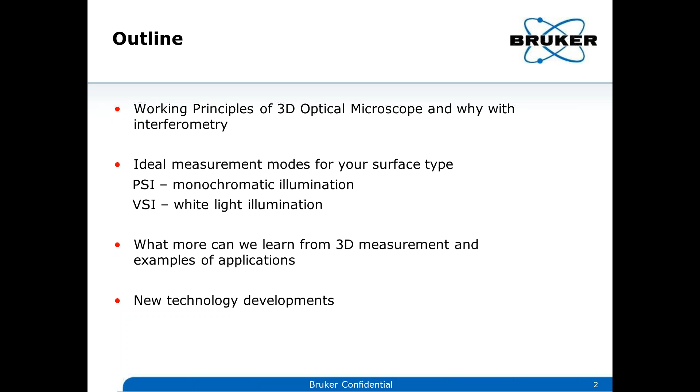Today, we'll be talking about a surface metrology tool using white light interferometry technique, and then we'll be seeing what it can do for your application. So the broad outline of the talk is going to be: we're going to talk about the basic principle behind white light interferometry, and discuss some of the different modes that are there and when to use which one to suit the application. Then we're going to learn a little bit about what more we can do from the 3D measurement. So what, other than roughness, what else can it inform us? How can it improve our research goals? And then I'll also briefly touch upon some of the new technological developments taking place in this field.

So let me first talk about where it's being used at the moment. Surface metrology, especially the white light interferometry technique, is being employed by many different industries at the moment, from automotive, orthopedics, contact lenses in medical device markets, making drill bits and solar cells, or also in PCB semiconductor industries. Many different places where you need surface characterization. You need to understand the smoothness of the surface, how well the soldering is done, certain features, certain contours that we need to measure.

So we have a saying: if you can't measure it, you cannot make it. That basically means, if you cannot measure a parameter, you cannot control it or improve that parameter. So that's one of the key things driving this technology.

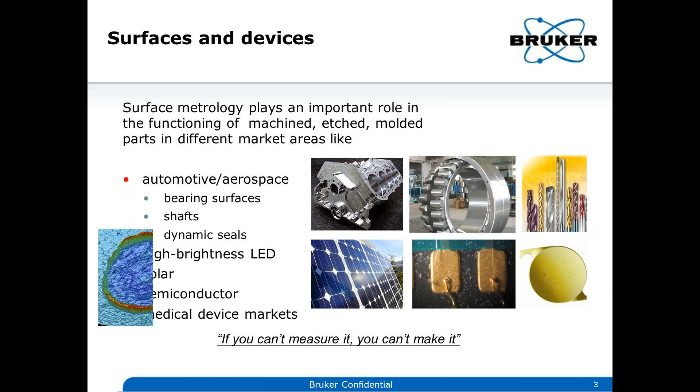So why use white light interferometry technique? Compared to the traditional surface profiler, it's non-contact. It's fast, so you can get, for example, a 4 by 4 millimeter area in a few seconds instead of the traditional few tens of minutes. It's accurate—the accuracy is in the range of nanometers. It's repeatable, largely automated, so you don't have to worry, it's very repeatable. And then you can measure topography, waviness, roughness, and some special parameters like S parameters, all those things.

So here, if you can follow my mouse pointer, this is like a traditional microscope setup for white light interferometry, but the objectives are interferometric objectives. If you look at a normal microscope image, it would look something like a black and white camera image. Whereas using our interferometric objective, you'll start seeing these interferometric lines—we'll talk about them a little later. Once you measure them, you can get renderings, like 3D renderings, or bigger areas like a 2D rendering, and you also see some kind of line profile there. We'll go through them one by one in the coming slides.

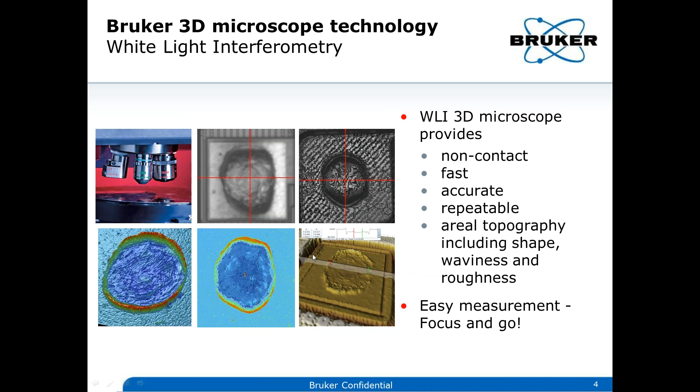So a little bit about the technology: it's based on interference, as I mentioned. What is interference? A very brief introduction would be, if you have a single source of light, and then you split it into two parts, and one of them goes through a slightly longer path length compared to the other, when you recombine them, you get this kind of interference fringes.

If you've gone out on a rainy day in the parking lot, you'll see this oil slick, and you see all these colors. These are coming from the interference fringes, coming from the top and the bottom layer of the oil surface.

So we use these interference fringes in white light interferometry like a contour map. Many of you would be familiar with the contour map, so it's going to look like the bottom image. You have all these lines, and each line represents a certain altitude, with certain numbering on them saying what the altitude is there. The closer the lines are spaced, the steeper the elevation is. On the top, you see there are no lines, meaning it's a very flat surface there.

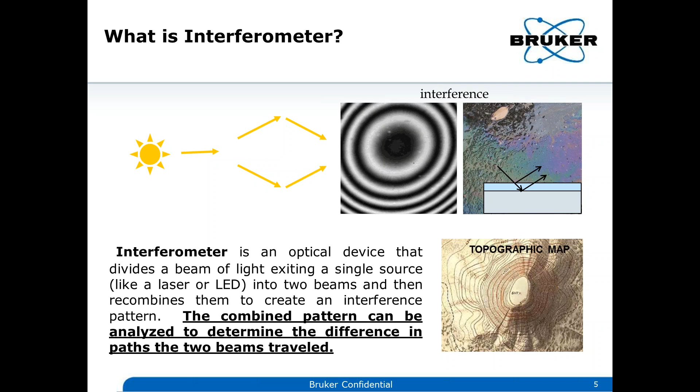So what is missing in our interference images normally is this numbering. You do not know, for example, if the interference fringe here is coming from a concave or a convex shape. We'll talk about it later, how we can get this numbering using white light.

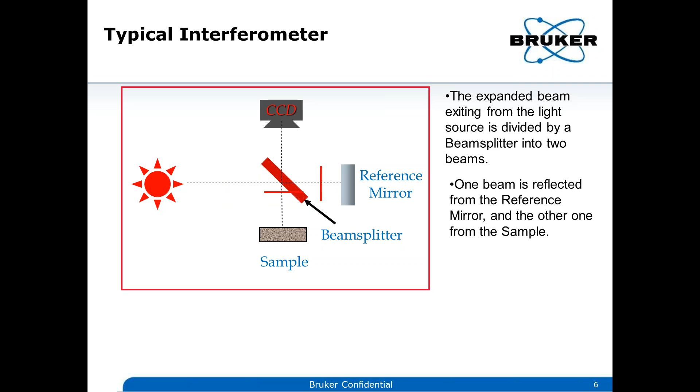So how it's implemented in our system is: you take a single source and split it using a plane beam splitter. One half of the beam goes to your reference mirror, the other half goes to the sample, and then you recombine them and collect the light in your CCD. Ideally, if your reference mirror and the sample are exactly the same, then you have path difference zero at the focus point, and what you see will just be a bright light in your CCD.

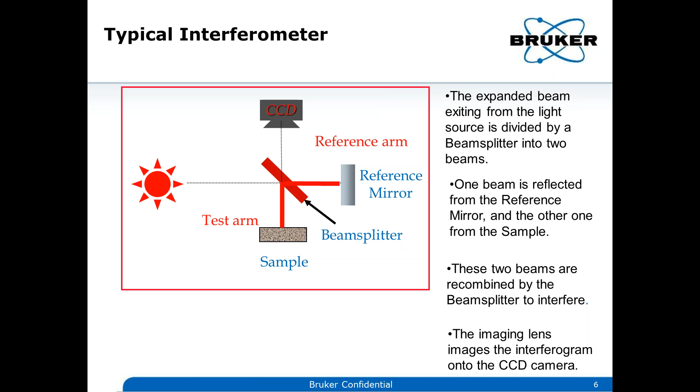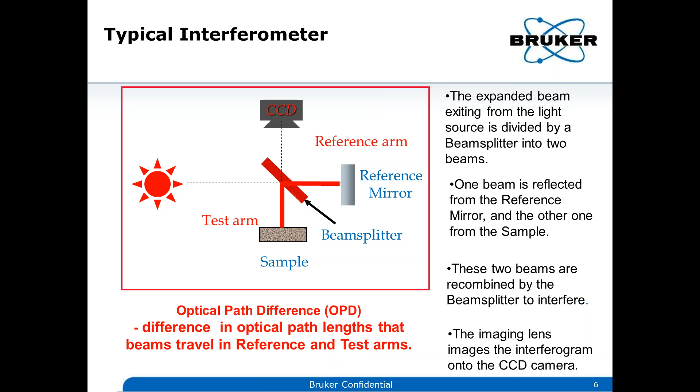But that's not the case. You're going to always have roughness and surfaces different from the reference mirror, and this creates the optical path difference, which is what you measure. That's why it's called the optical path difference, and all the files you save will be called the optical path difference file. This is the main data, and this creates the interference, from which we can calculate all the parameters we're interested in.

So a little bit more about the fringes. If you take two plane wavefronts, two beams, and one of them is tilted from the other, then at certain places you have the difference between the plane one and the tilted one equal to lambda, the wavelength of the light you're using. At certain places you have two lambda, three lambda. So every integral multiple of this lambda, you get a bright fringe. And at the half integral, lambda by two, you get the dark fringe.

This is like a monochromatic light. If you use a red light, you get something like this. Let's keep this in mind - if you have these kinds of bright and dark fringes when you have a small tilt, we'll talk a little bit more about them later on.

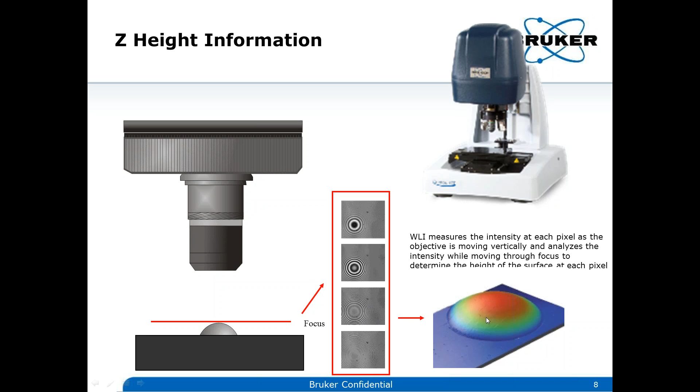So if you have a lens or something like this, a convex shape, what happens is we try to change the position of your objective. By doing that we change the focus position, and thereby we see the fringes also change. If you focus on the top position, you get the fringes like this, whereas if you focus a little bit lower, somewhere here, you get some fringes like this. So you move your objective basically, and you collect the whole surface, recreating it.

So this is very similar to a normal microscope. The difference in this white light interferometry is basically the objective and the algorithms that analyze your data. These are the two differences.

There are three main types of interferometric objectives. The most commonly used ones are Michelson and Mirau. Michelson is basically what many people are familiar with as the Michelson interferometer - it has the same principle. Mirau is a slightly different take on that same principle of interference.

Michelson is basically: my sample is here, and I have a beam splitter in front of my objective, and one half goes to the reference mirror and the other goes to the sample. Then I collect them all through my objective and analyze it in my camera. So for example, here you have the reference mirror, the beam splitter sitting somewhere inside the objective, and your sample is here.

This technique works for low magnification because you have enough working distance to put your beam splitter and other things. But when you go for higher magnification objectives, like more than 20x, your working distance is very small. There, you come up with a new design, the Mirau Interferometric objective.

Here, instead of one beam splitter, you have basically two. So you have a beam plate here, and then another one with a mirror. It's a very small mirror, and compared to the field of view, it's negligible, so it doesn't affect your measurements really. So you have this kind of technique, and you can go up to 100x in this.

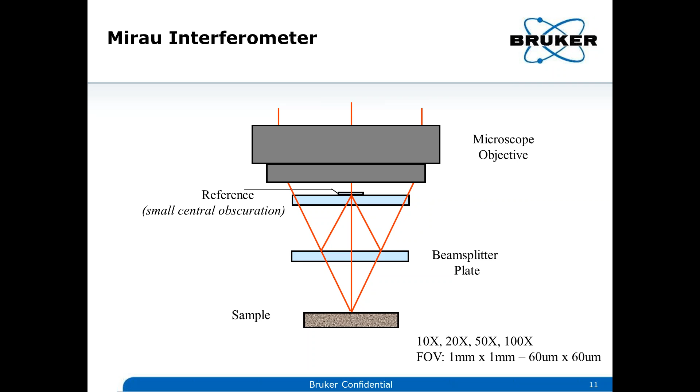So basically, if you use a Mirau objective now, you have a little more detail here. You have the source, and you split them. One goes to the reference mirror, the other goes to the sample, and then you collect them. So the path difference created by the sample roughness and other things would create the interference fringes.

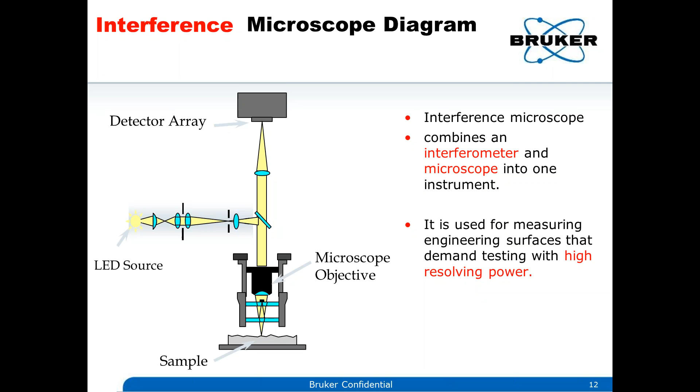So the one advantage of relying on interference fringes instead of just the focal depth or things like that is the resolution is very high. The Z resolution is not limited by the objective. It's very high, about 0.1 nanometers Z resolution.

So there are 3 major modes in a white light interferometric technique. One of them is called Phase Shifting Interferometry, or PSI. This technique can be used for ultra high resolution imaging, sub-nanometer Z resolution, for very, very smooth surfaces like your silicon wafers or your mirrors, or very fine thin film coatings, those kind of applications.

And then you have vertical scanning interferometry. Here the resolution ranges from the nanometer range to the millimeter. You can measure all kinds of roughness from nanometer range to millimeter. So it's kind of like an all-terrain vehicle, I like to think about it.

Whereas the phase shifting interferometric technique would be something like a Formula 1 car, right? It's for very high speeds and very smooth tracks, works brilliantly, whereas the all-terrain vehicle works on all tracks, but with a little bit higher noise floor.

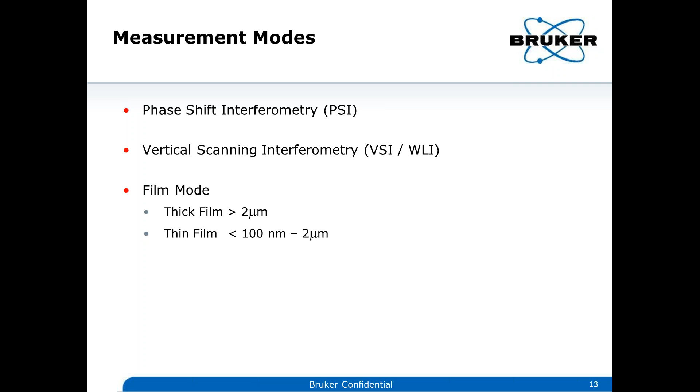And then we have different techniques to measure thick film and thin film thickness, or basically if you have a transparent film, we can measure how thick the film is. We have 2 different modes to measure thin films, that's like say 100 nanometers to 2 microns. Or if you have a really thick film, greater than 2 microns, you can use the thick film mode to measure it.

Let's talk a little bit about the phase shifting interferometry, or PSI technique. As the name implies, what you sense here is the phase change. So what you do is basically you have the light, and you just change the phase of the incident light, and then you still detect it.

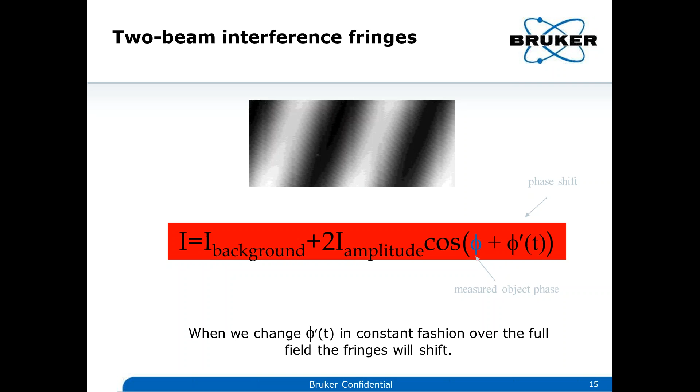And then basically your fringes also will shift if I change the phase. I think you can see the image move. So basically, if I have a mirror, for example, and then I shift the phase slowly, 90, 180, 270, and 360, then I can get this fringe shift. So basically I collect all the intensity, and then I can calculate the phase, and use this information to calculate how smooth, or the roughness, of the sample surface.

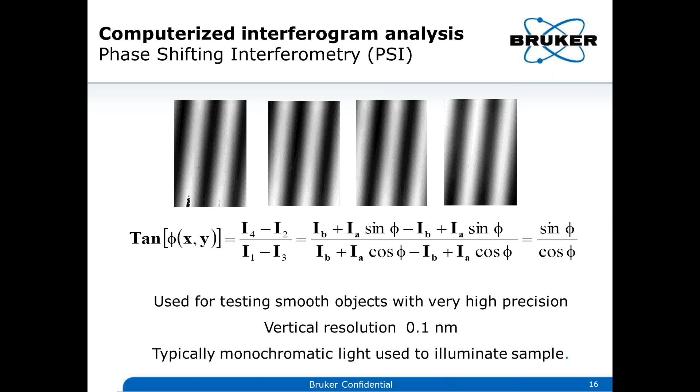Typically, we use a monochromatic light for this kind of application, and the resolution is very high. As I said, it's sub-nanometer resolution you can get through this technique.

So here I show you an example. It's a very, very flat mirror. Similar ones are used, for example, in satellites where you have these mirrors, or many different applications. So here, if I just look at the fringes, I would just say, oh, it's very smooth, there is no roughness, the fringes are parallel to each other.

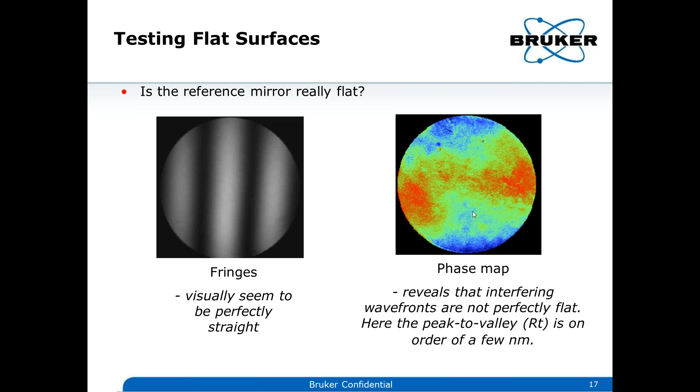But whereas using the phase interference technique, I can actually see the roughness. There is some roughness involved, which is only a few nanometers, but I can see it using this technique. So you can get this AFM kind of resolution in Z very quickly and over a large area.

Vertical scanning interferometry is like an all-round player, so you can do many different samples and all kinds of analysis using this technique.

If you remember the previous slides where I have two tilted wavefronts creating interference fringes, the distance between two bright points is lambda, the wavelength of the light. If I use blue light, the distance from 0 lambda to 1 lambda is a lambda, and 1 lambda to 2 lambda is also another lambda of the blue wavelength, say 450 nanometers. Now if I use green light as well along with it.

The green light also has a lambda difference between the bright fringes, but the lambda is bigger than the blue light, so you see some shift. Now if I use yellow light, that's another shift.

So basically in white light, I have all these different colors - blue, green, yellow, and so on. I can use the shift you see between blue, green, and yellow as a kind of numbering of your contour, so I can tell which is a concave or a convex surface.

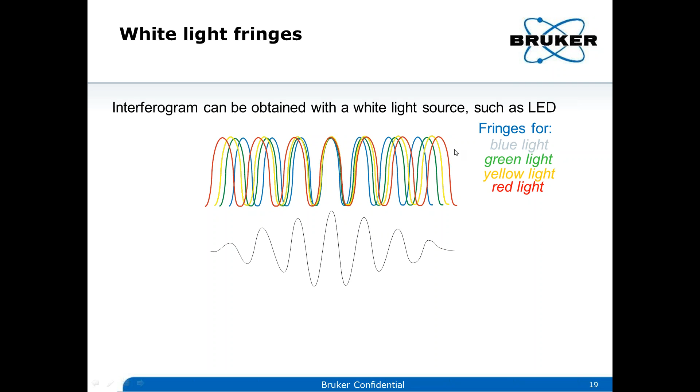If you have just a black and white camera, you just get a sum of all this intensity, which still informs me which is the zero position and how the surface is going. If it's tilted above, I would see from the center to this point. If it's tilted below, I would see it this way.

But you don't have to do this counting yourself - the algorithm takes care of it. But this is the principle that drives the algorithm to give more accurate results.

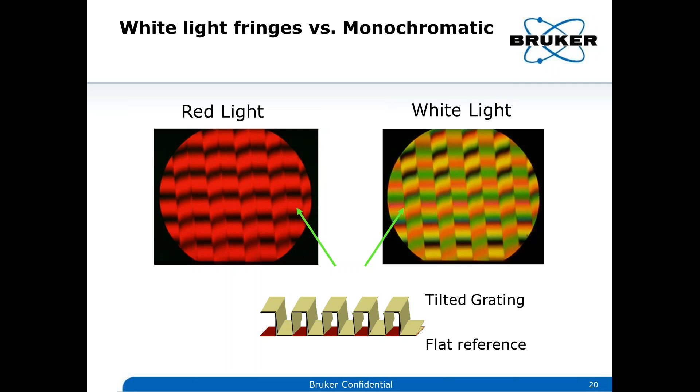In general, if you have very rough surfaces, the white light interferometric technique is very accurate compared to the PSI technique. PSI technique is limited up to lambda by 4 roughness. So if you use a green light, which is typically what we use, the wavelength is about 560 nanometers, so your roughness can measure up to 140 nanometers.

So when you capture the image, you're basically looking at the best contrast of the fringes. That means whatever point is in focus, you measure the fringes at that point. When it's on top, you see the top surface at best contrast, and when you move the objective down, you get the best contrast fringe on the bottom surface. This information is collected by the computer and analyzed by our algorithm, and then you get the surface.

So even though the optic image looks very smooth, you can see the rendering, all these kinds of surface features - a lot of roughness. You can measure this kind of data.

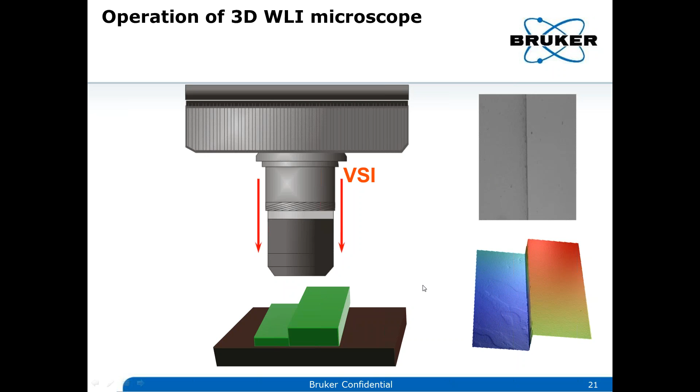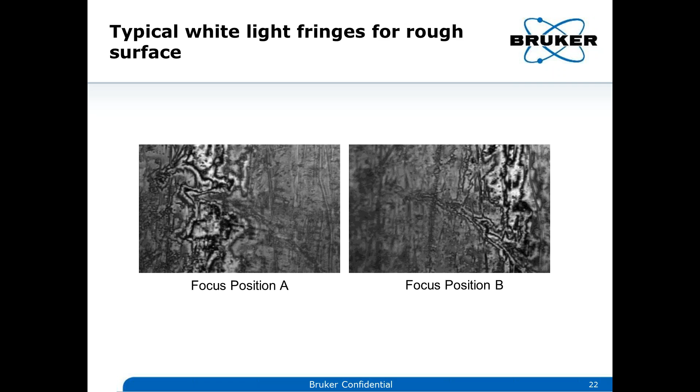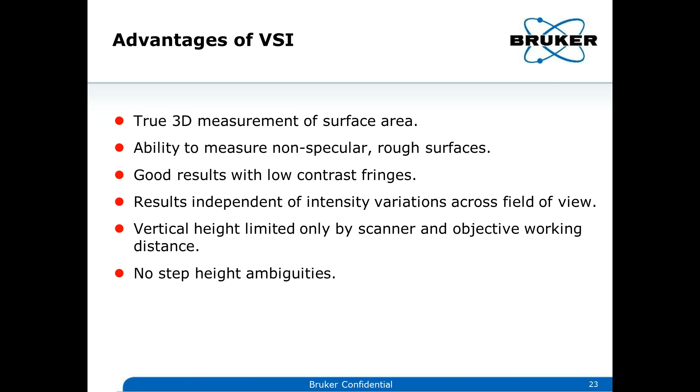To summarize, it's a true 3D measurement. You get the surface area and can measure all kinds of rough surfaces and get good results, from all kinds of reflective surfaces - black samples like black polymers, tires, or O-rings, to very shiny surfaces. You still get very good results with this technique, and it's invariable of the objective you use, with no step height ambiguities. So you can measure from the nanometer to millimeter range, covering all kinds of surfaces and roughnesses.

So when we measure, what do we normally measure? Every time you measure, you get three kinds of information: one is the form of the surface, the second is the waviness of the surface, and the third is the roughness of the surface.

Here I use this mountain near our factory in Arizona. The form basically means this rough outline. For example, if I have a ball bearing, the form would be the radius of curvature of the ball bearing. So here, this mountain represents the form.

The waviness, for visualization purposes, you can think of like big rocks on top of this mountain - massive rocks bigger than us that create the waviness. If you look closely in this picture, you see a lot of big rocks that you can climb on, creating the waviness. The roughness you can think of like the small stones under your feet when you walk up the mountain - pebbles and small rocks that create the roughness of the surface.

So every time you make a measurement using the white light interferometry technique, you get these three data: form, waviness, and roughness. By choosing the appropriate filter, you can get the relevant information.

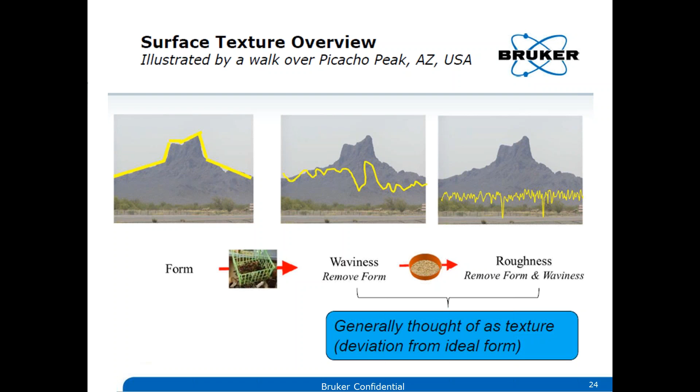To summarize everything I mentioned: you have white light interferometry, or the VSI technique - vertical scanning interferometry - and the PSI technique, phase shifting interferometry. The vertical resolution of white light is 3 nanometers, and PSI is 0.1 nanometers, or 1 angstrom. Roughness you can measure up to 10 millimeters with a BRUKER white light interferometry tool - from nanometer to 10 millimeter, a big range. Whereas with PSI, you're limited to lambda by 4, about 140 nanometer roughness. So if your RA is below 140 nanometers, you can use the PSI technique.

The white light technique can measure rough, steep samples. PSI technique is mainly designed for polished material with very low height variations. The speed for white light interferometry can vary from 5 to 80 microns per second - that's how fast you can move your objective in Z - whereas with PSI it's a second or two, since you can quickly change the phase of the incident light, making it very fast.

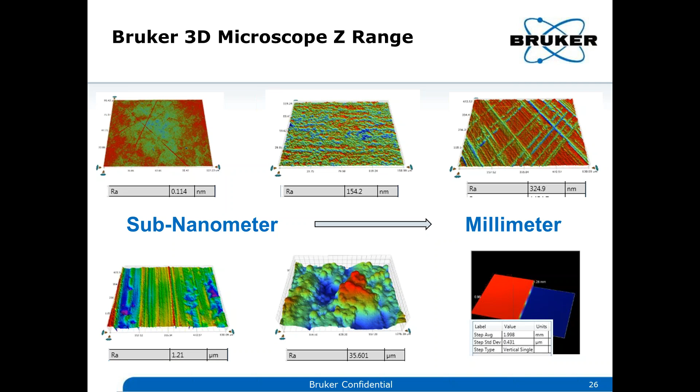These are some examples using our BRUKER 3D microscope. You have sub-nanometer measurements, like a wafer, all the way up to a few millimeter range - this is a big step here, about 2 millimeter range. So you can measure all kinds of surfaces. These are surfaces of a cylinder where you can see the honing angles, some milling surfaces, and some pits, maybe due to corrosion or other reasons, along with differently prepared surfaces of different roughnesses. One instrument can cover the whole range.

So we talked a lot about getting this nice 3D images. Traditionally, when people talk about surface roughness, they talk about stylus profiler data, which is 2D. So you get X and Z or Y and Z. That's it. So then you measure RA, RQ, and all those things.

So why do we need SA? First, let's understand what SA is. SA is like 3D data, a 3D equivalent of RA. If you have a line profile, you can calculate RA. If you have a 3D image, you calculate SA. It's basically a double integral instead of a single integral like you do for RA.

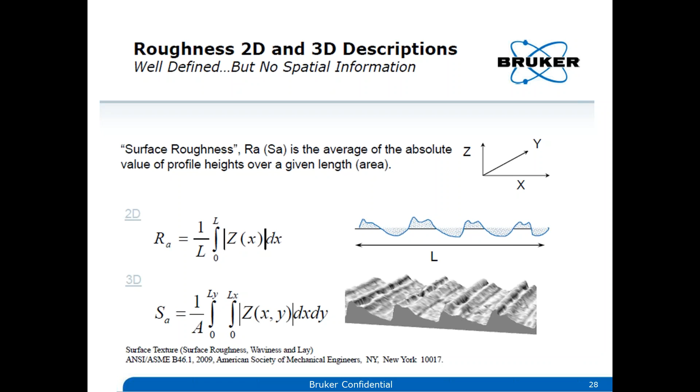These are all ASME standards. So you also have ASME standards for S parameters, like you have for R parameters.

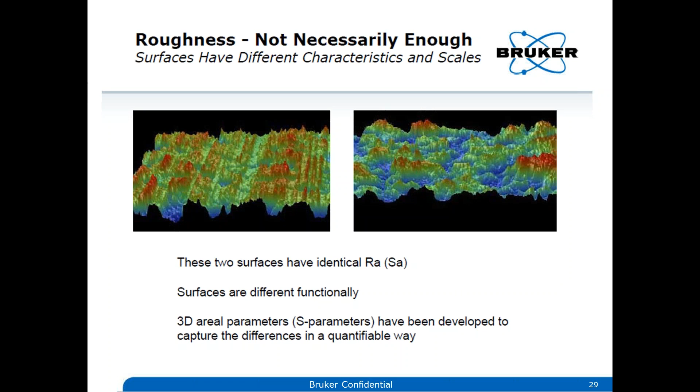And that's why a lot of people are gravitating towards these 3D areal parameters. And that's why we need techniques like white light interferometry to give you this data that can be helpful when you're trying to develop your engine or other components.

So here are some examples of differently milled surfaces. You have different kinds of milling processes or finishing processes when you do engineering, and you get these different surfaces that come out of it, and you can clearly see each one is very different. If I put some of them together, they might give you the same RA, but they would behave functionally very different.

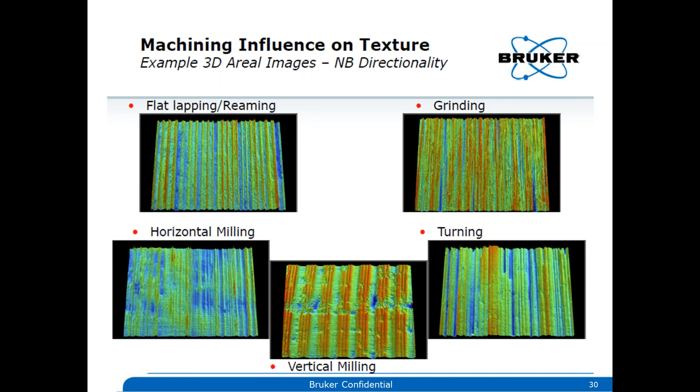And that's why you need to do this kind of thing. So we talked a little bit about SA. What other parameters are there which use this new 3D image?

Quite a lot of them. So you have these amplitude parameters, basically SA, SQ, SZ, and things like that. These are roughly analogous to your 2D parameters that most of you are familiar with, like RA, RQ, RZ, RKU, etc. There are new parameters like these hybrid parameters, SDQ, and then you have the spatial parameters, and also some functional parameters.

Functional parameters can tell you about your bearing area. You can get the bearing curves out of it, and what's my fluid retention ratio of the surface - will it retain more fluid or less fluid compared to my original surface? Those kind of things are very useful when you're trying to develop a new engine component or machining component. You want to know the lubrication, what kind of lubrication to use. So this kind of data can help you a lot.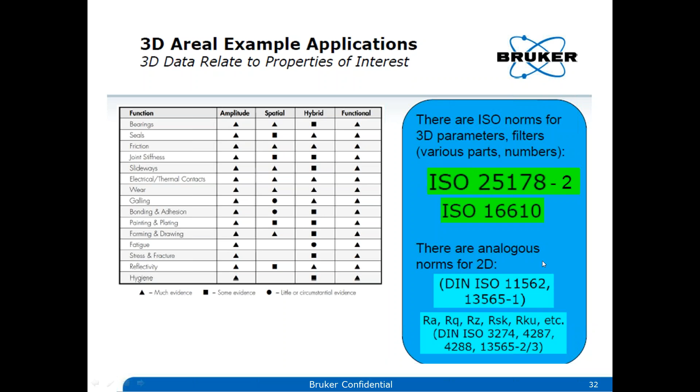So there are a lot of ISO standards on this, a lot of research publications on this. I mentioned some here. You can find more if you do Google or a web search on that.

So let's move a little bit towards the different applications. We talked a lot about this, the functional parameters, right?

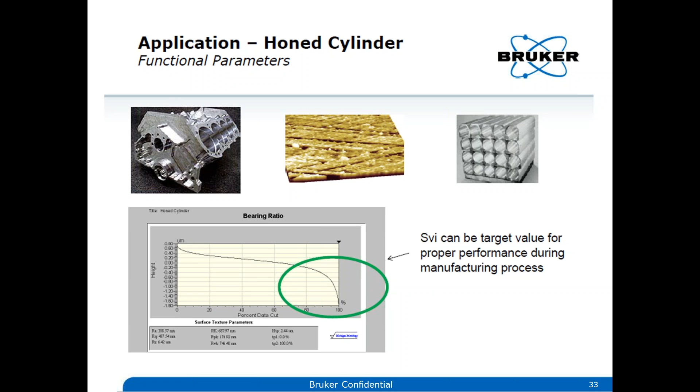Here I talk about the SVI, or fluid retention ratio. Here we have an engine block, and inside the cylinder it is honed, with lines angled at a certain angle. People play with this so they keep an adequate amount of lubricant in there to help the motion of the engine, but not so much that it impedes efficiency. This curve, many of you might be familiar with, is like an Abbott curve. You can use this curve to calculate a lot of parameters, one of them being the SVI parameter, and you can tell how good it is.

So here we have a similar surface, and now we do a lot more analysis. We take a new cylinder bore, and another bore that's been used for 1,000 cycles or so, and calculate parameters like the bearing index and the fluid retention ratio. Comparing a new surface to a used surface, you see there's not much difference, which means you can safely say you can run up to that many cycles, maybe 10,000 cycles or 10,000 hours. So these parameters help you determine safe use.

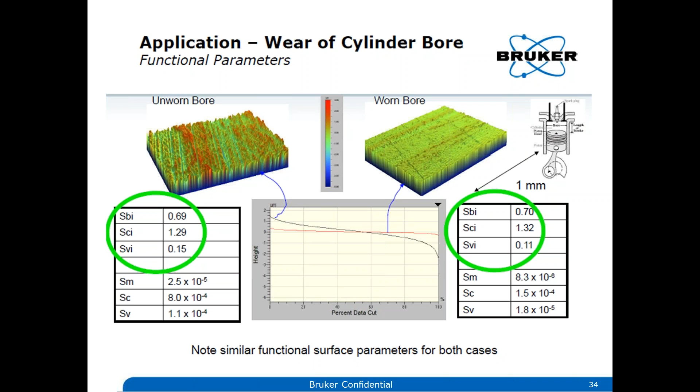We have different tools, and BRUKER has one called NP Flex. Using this tool, you don't need to cut open a cylinder block or engine block to see inside it, before or after. You can use the engine block as is, with special objectives that go inside and map the surface. You can map the whole cylinder and stitch it together to get the whole side wall of the engine, and you can clearly see the hone angles.

Continuing with our theme, wear is also one of the important parameters that needs to be controlled. There are many different techniques to do wear experiments. One method uses our reciprocating drive in the Tribolab tool, producing a wear scar. You can measure the wear scar and calculate all kinds of parameters from it. Traditionally, people used waviness parameters to calculate volume lost from the surface due to wear. Now, with new tools, you can directly calculate the volume lost, the surface area increase from wear marks, where the material pileups are, and the roughness increase—everything quite easily.

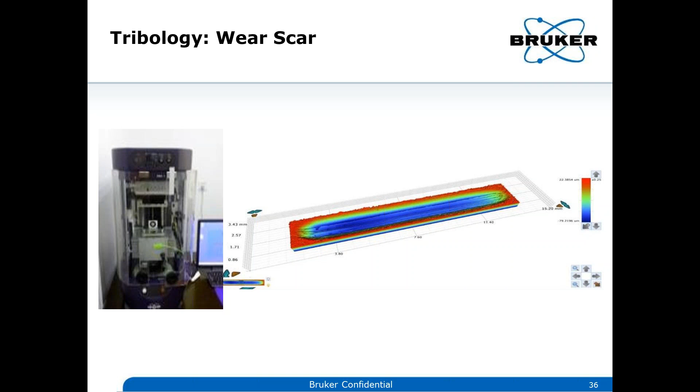Here is an example of an O-ring that had some flaws due to operating conditions. You can measure these flaws using techniques like multi-region analysis to calculate the volume or depth of the scar. Compared to the engine block, these are very black, low-reflecting samples, but you can still get very good data. Even though reflection is the main source of your signal, whether you use a dark sample or a very bright sample like a mirror, you can still analyze the surface.

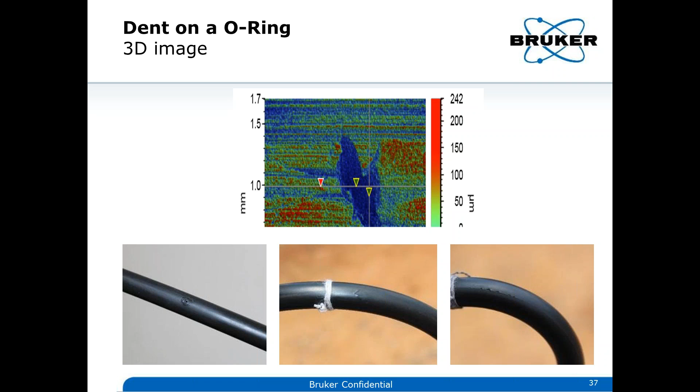Another example where these techniques are used is in LEDs. The LED sits on a sapphire substrate, and on the backside of the substrate there's porosity that needs to be measured and controlled. In the old days, you'd probably just get an image like this and have to manually measure the length and size of the pores. Now, using multi-region techniques, you can quickly identify the different pores, how big they are, and their volume—automated, with no human error, calculating huge amounts of data in just a few seconds.

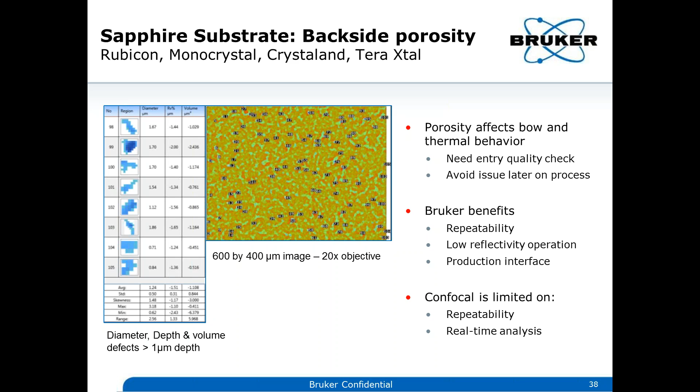Maybe 5-10 seconds, something like that. So this is a definite advantage for a technique like white light interferometry. It's repeatable. So if you're measuring samples like in the LED industry, you are measuring large area samples, so you need it to be repeatable. Some of the surfaces can be intentionally low reflecting, so you need to be able to measure that. And you should be able to do this real-time analysis, and do all that very quickly as well.

Another example would be in the optics industry, when you have super polished glass substrates for many different applications. If you're developing X-ray optics, or deep UV lenses, or optics for lithography, you need your lens surface at a certain tolerance, which is very high, sub-nanometer tolerances. So you need to be able to measure it quickly. If I have to take every lens and measure it with AFM or a complex system, then it's a little slow. You need a very fast technique with very high Z accuracy to be able to do that, and that's where white light interferometry techniques come in.

So you can get a very large field of view. Here, for example, you can see the field of view is about 1 by 1 millimeter, which is fairly large. On the resolution, you see the RA is 0.1 nanometer. We measure this with the PSI technique. If you use, for example, techniques like confocal, you have to choose a very high magnification objective to get this kind of Z resolution, but then you sacrifice on the field of view.

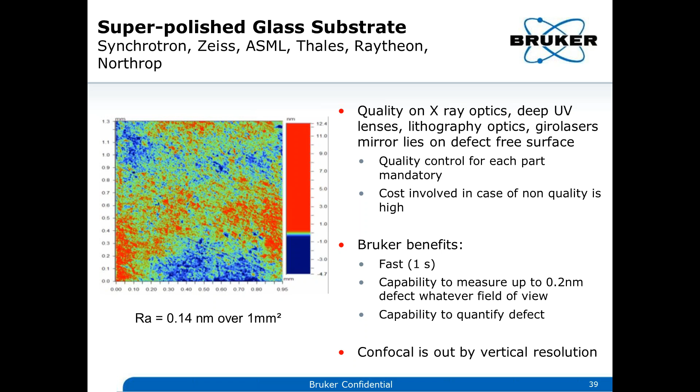So you're only able to measure a very small field of view, which is limiting again, because you want to be able to analyze a very large area very quickly. With our technique, you can measure a very large area very quickly with very high resolution. As I mentioned before, the interferometric technique is not limited by the magnification of your objective. So if you use a 5x objective or a 100x objective, I can still get a Z resolution which is sub-nanometer using the PSI technique.

So some examples from polymers. You have different kinds of polymers, and you're trying to see how these polymer adhesions are to certain different surfaces, because you coat them for improving certain properties. For example, many of you are familiar with Teflon coatings to make it hydrophobic. So polymers are used for many different properties. Some of the customers who use it, like DuPont and 3M, develop a lot of polymers and they want to see how these things are. Surface property also influences some of these functional properties. Surface roughness will influence your adhesion or the longevity, how long your film lasts. So those things we need to control.

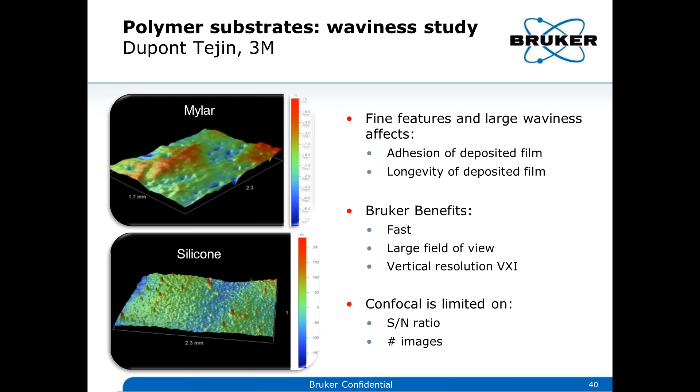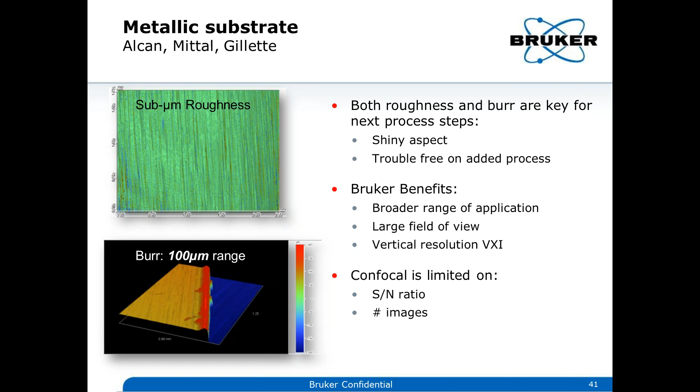And some examples from the semiconductor industry. The White Light Interferometry tool is used almost at every step, from wafer manufacturers all the way to the packaging side, and even when you do the PCBs to check that the solderings are done correctly. So for example, if you take your mobile phone, almost every part of it has been processed by a White Light Interferometric tool, and many of them are BRUKER tools as well.

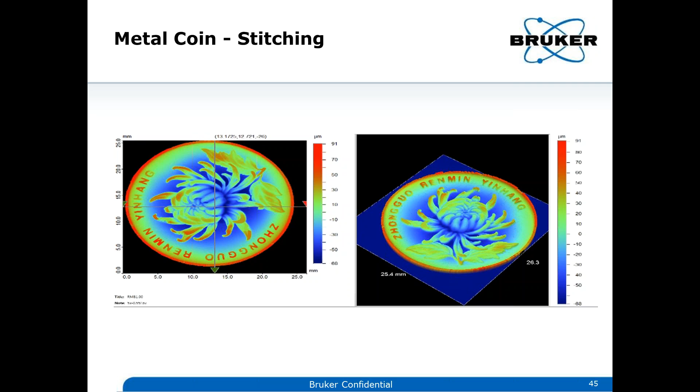Some examples - I think this is a Chinese coin. If you have a rupee, or I'm from India so we have rupees, or US cents - every country has a coin, and you have all these nice features there. These are all stamped using a mold, and you need to control how good the reliefs are, because these reliefs are quite complex to prevent counterfeits. You need to make sure the reliefs are well developed, and also that the mold is not broken. If the relief is broken, it's not good, so you need to see whether the mold is bad or worn. So we need to control those kind of things, and people use our tools to do this kind of control.

Now touching a little bit upon the medical industry - this is the orthopedic industry. If you have old relatives who have hip implants, they have two surfaces where you replace the hip with these metal things, like titanium alloys, and you have different kinds of roughnesses. You need a certain roughness - it can't be too smooth, or then you don't have any muscle or anything that grows on them. You need to enable some growth of certain biomolecules on top so that it's taken well by the body, and it can't be too rough, or it starts damaging other parts of the body. Or the counter surface of your hip implant.

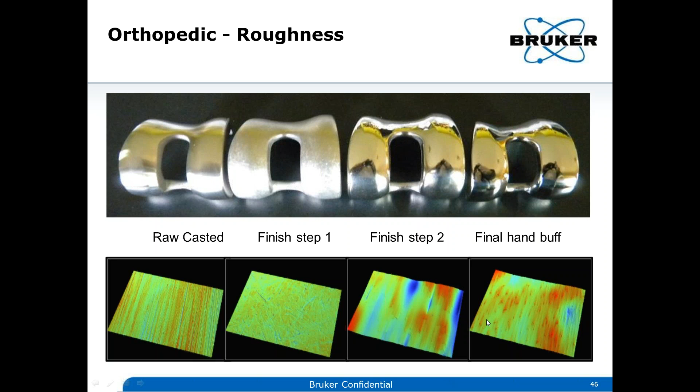So we can see here different steps of the process, how the final polish or final finish is obtained, and you can measure and control it. For example, here you start with the raw casted part, and you can see clearly the molding lines or casting lines. You finish the first step, then you smoothen it so there's no more those lines, then you polish it and you start seeing the polishing lines, and you repolish it again, and now it's quite smooth. You can also see it by eye, but now you can control it very precisely, to the nanometer level.

Our example here is a dental implant. So if you have root canal done and you have a new tooth, you can measure these kind of threads, how thick the threads are, and you can control them and also automate them. Using our tool, you can automate. If you have many threads, you don't need to manually go there, you can make your system automatically go.

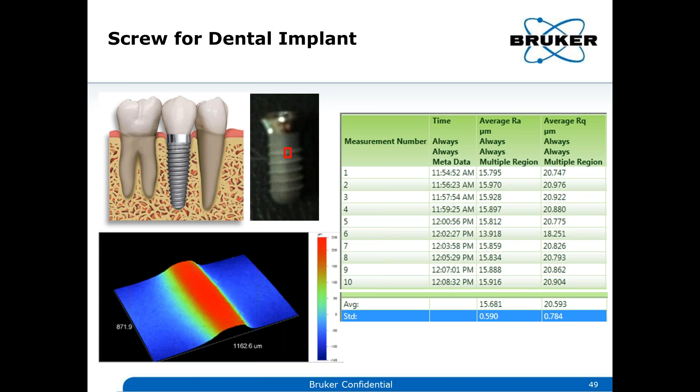For example, you have 10 steps, 10 points. It automatically goes there and measures these 10 points, measuring Ra and Rq automatically at these 10 different points. So you can automate it as well, so if you have a very large sample, you can do that.

Here are some laser engravings. You put your brand name there, and when you mark it, you create a certain amount of burrs, and certain marking depths. You can measure that quite accurately. These are also there in contact lenses, and if these burrs are too high or too sharp, it's not very comfortable for the wearer. You need to have them below a certain height or roughness, so that it's acceptable to the user.

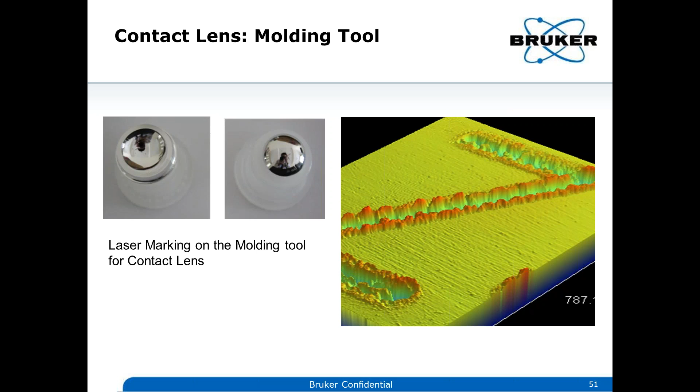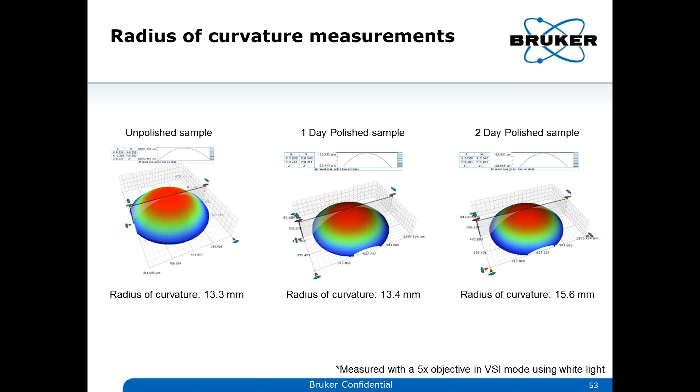Here are more applications from contact lenses. One of the things they need to measure is the lens's curvature, to make sure of its shape. Here you have different polishes, and you see that after a certain polishing the curvature shoots up, which is not good. So they need to change certain things in the polish, to make sure the curvature doesn't jump, reduce, or increase, to maintain certain roughness.

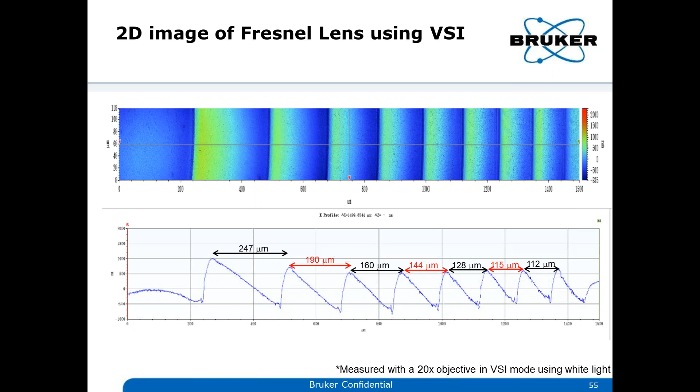Also, if you have bifocal lenses, you need these kind of complex Fresnel lenses. You have these steps, and you can measure them clearly here. You can also measure the distance between each step and the height of these steps. All these things can be measured, and used to control the processing, so that the end result is as designed.

Here's some more from precision engineering. This is like a watch gear. If you have a high-tech watch like a Rolex, there are a lot of these mechanical components, and the teeth need to be of certain dimensions, which we need to measure. When you precision machine it, there's always some deviation from the design, right? So you expect it to be 1 micron, but it's 1.05 micron. We need to know how much the deviation is and whether it's acceptable.

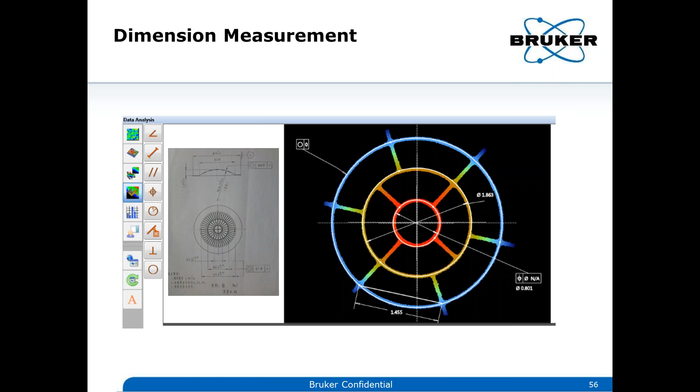So we can measure those things. We can measure the diameter of the different rings, the angle between the arms, the gear thickness, the width of the wheels—everything we can measure quite easily.

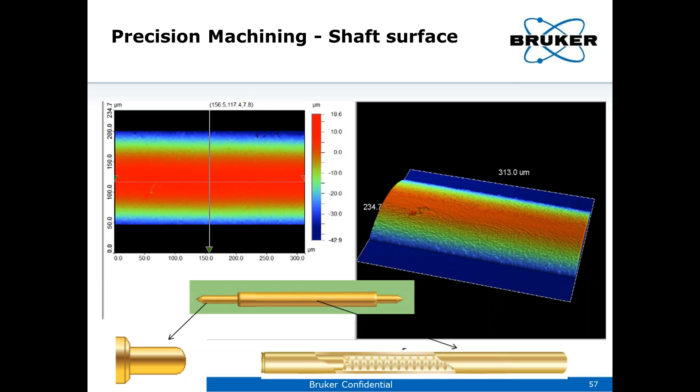So I talked initially about semiconductors, and you have these probe marks, right? These probes are actually these ones. You actually measure the probe shaft surface too, so that there's a spring inside, so that the loading force when it touches the substrate is not too high. You also need to control the roughness of this so it doesn't scratch or abrade your silicon wafers. So you can measure that as well. We do measure these things for some of our customers.

And if you have an oil pipeline or a gas pipeline, you have these things called coupons. Instead of taking out the whole pipe to check whether corrosion happens, you have these coupons inside at certain places, and you take them out. These coupons are something like a cylinder sitting inside the pipeline, and using an NP-Flex system you can measure the whole surface and then stitch them together. Then you can open it up and see all the corrosion pits that happen, and measure the volume of the corrosion, how much the surface area increased, and judge whether the pipe is still functional or needs to be replaced. Those kinds of things we can calculate on the live system.

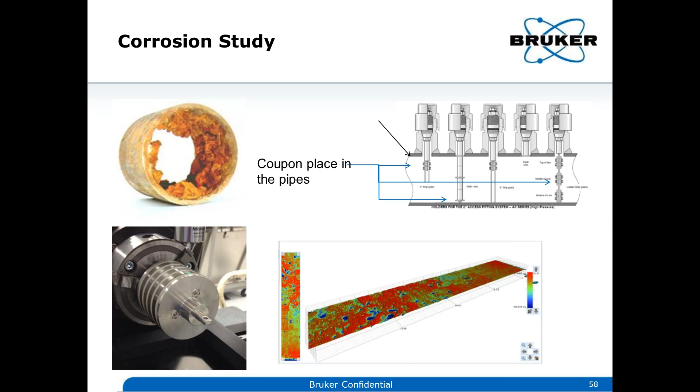So now there's new software that we released, called Vision64 Map. This improves our existing software, enabling better visualization and rendering techniques, and also language support. Now you can get the user interface in 11 languages, and you can use the software as a standalone one. You can get all kinds of different standards too, not only ISO or ASME. If you're Japanese, you can get the JIS standard. If you're using the European standard, like DIN for Germany, you can get all these kinds of standards as well, and you can get more reports.

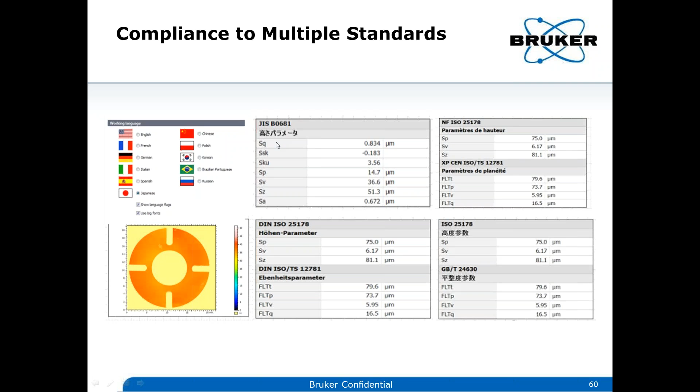So here, for example, I show an armature and some outside part of it. You have this different language support, and you can get reports in all these different languages. Sometimes your customers are German or somebody, so you can use German reporting and their DIN standard, or you can find the equivalent ISO standard. So ISO standard is 25178, and then you can find the equivalent DIN standard or JIS standard, and calculate it, whichever standard you need.

For example, now there's all this new analysis that's possible. When you precision machine something, you have a surface, and the surface is not exactly what you want - there are deviations, sometimes positive, sometimes negative. So now you can take a surface and fit, for example, a radius of curvature, and see how it's deviating from this mean radius of curvature - certain places deviating inside, certain places outside. You can set tolerances, and if it's okay, below tolerance, you get a green coloring, or if it's above tolerance, you get a red coloring. So you can now do all these kinds of different renderings and analyses with our new software.

So these are some basic overview about our system. I hope I covered some things we can do other than just roughness measurement using white light interferometry technique. We went through some of the strengths of this technique and what information it can give, and where it's applied in different applications. So if you have any questions now, feel free to ask or type.

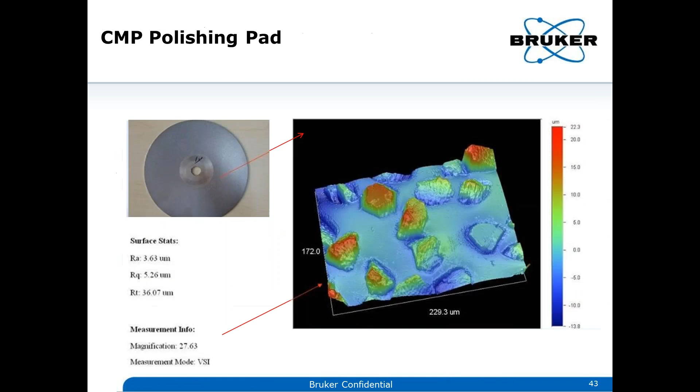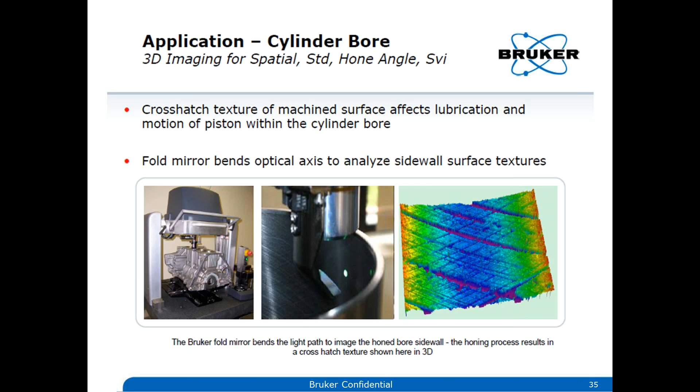We can talk a little more about the details. If you have this application, you can write us an email and we can discuss in more detail whether it's feasible for your holes. Let me put back the email ID so you guys can note it down. There you go. You can write us an email at this address and we can get in touch with you.

What's the biggest lens we can measure? So the GTK, that's one of the basic models, has a stage size of about 150 by 150 millimeters. That's the only limiting factor. If you use the smallest objective, the field of view is about 4 by 4 millimeters, and then you do a stitching — you measure many of these and stitch them together so it gives a uniform view. Some of the lenses I showed you went through this process, but you can't see the stitching at all; it's done very well. If you take a bigger system like the NP-Flex, the only limiting thing is the stage size, so you can measure really big samples. It's 150 millimeters on the smallest system, and it can go up from there.

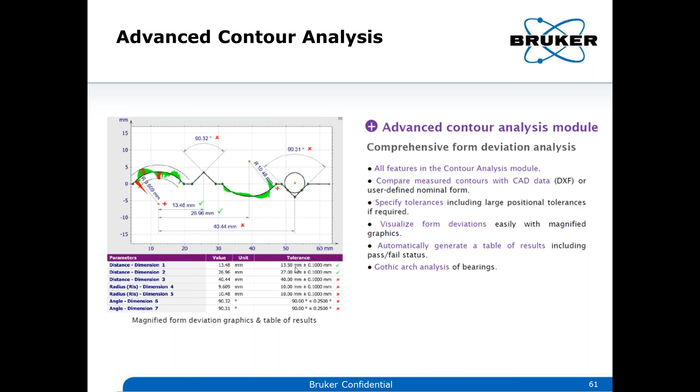What's the max depth we can measure? Well, it depends, so I don't understand the question correctly — is it the depth of the bore, or the deepest bit I can measure? The deepest bit I can measure is about 10 millimeters, that's the Z range I have, so any roughness within that range I can measure. If you're talking about inside a bore, using certain special objectives we can measure bore depth — for example a 12-inch bore, you can measure inside there. So depending on the objective you choose, it can vary. The bore depth can differ, but the Z travel is more or less constant at about 10 millimeters, so you can measure roughness up to a maximum of 10 millimeters.

Okay, seems we don't have any more questions.